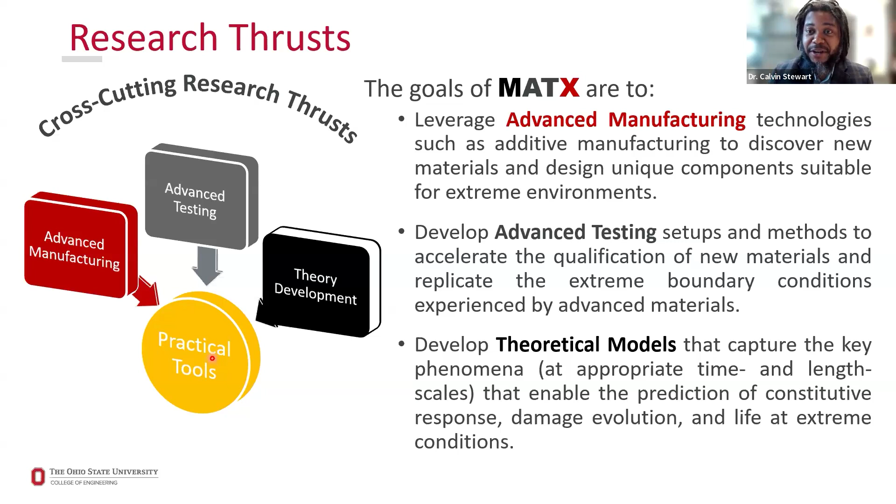With these new materials that we make, we then need to figure out how to test them, how to make sure they can survive those environments. So we also focus on developing novel, advanced test methods that allow us to more rapidly screen the resistance of materials to extreme environments, to create tests that mirror the real world rather than the laboratory they would usually be conducted in. And then finally, with the results of our experiments on our custom materials, we explore the response of materials at these unexplored domains, and develop new equations, new theories, or new ways of predicting the response to extremes.

Much of my research, I like to think on a high level. I like to think about what's motivating us. What in society are these environments where we see extremes? At the current place we are in society, the extremes are pretty extreme.

Whether it's hypersonic vehicles flying at 5 to 8 times the speed of sound with combustion temperatures over 3,000 degrees Celsius, or liquid-fueled rocket engines, your SpaceX's of the world, burning at over 3,000 degrees in their combustion nozzle for about 5 minutes to get to orbit, maybe flying multiple missions, to jet engines, to our fighter aircraft subject to flight dynamics with turbine entry temperatures exceeding 1,800 degrees Celsius.

Or even the lower temperature but still extreme industrial gas turbines, subject to 1,400 degrees Celsius, asked to survive and operate for up to 30 years or more. In all of these 4 use cases, these are materials being asked to survive above the base metal melting temperature. Nickel superalloys melt around 1,200 to 1,300 degrees Celsius. So in every one of these cases, the base metals or base materials we use would actually melt in reality. So what do we do?

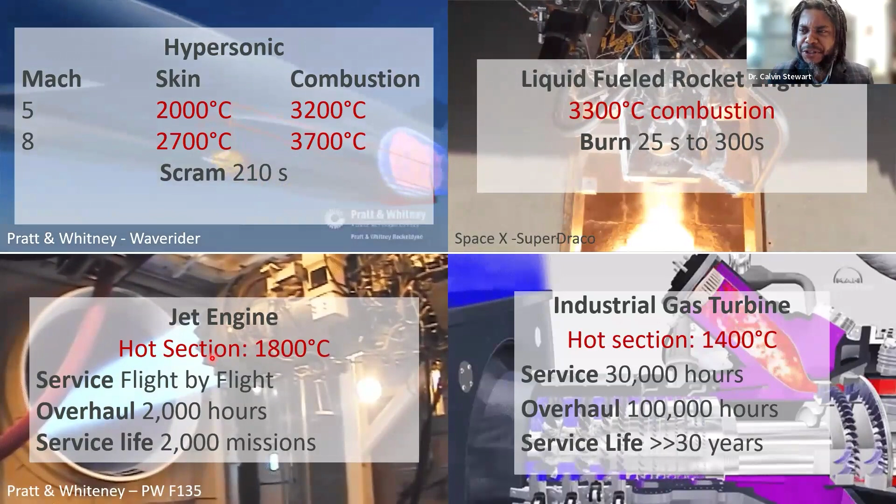So how do we push? How do we get to 4,000 degrees? How do we push beyond these limits? How do we increase performance? That's the question my group is really interested in answering.

Now, there are two kind of pillars or places that we sit in development of new materials. One of them is the concept of the materials genome initiative. This concept that we can computationally design from chemistry, we can predict structure. From structure, we can predict properties. And from those properties, arrive at performance in extreme environments.

But there's a lot of steps in this material genome initiative that we have to step through, from basic computational thermodynamics and molecular dynamics, to then making the material using additive or small scale arc melting to create small samples, to then post-processing, thermomechanically processing materials to arrive at a good structure, to then testing and qualifying the performance of those materials and components.

What my group sees is that there exists a bottleneck, another step needed to accelerate the materials genome initiative. That is this idea of developing rapid screening tests, where we can take very small volumes and samples, get parallelized information, more than one test out of a sample, in order to rapidly screen the resistance of these candidate materials and tell us, should we go back to the drawing board? Do we need to go back to chemistry?

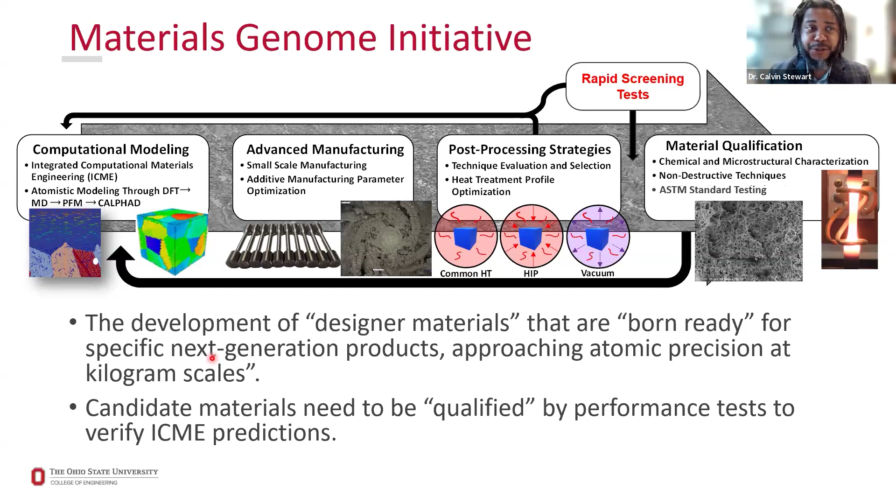Or can we actually proceed with the very expensive qualification required to get to service? With additive manufacturing specifically, the costs for qualification can be quite high. There's installation qualification of your equipment being installed, operational qualification, which is getting baseline ability to print the material of interest, to get it fully dense with a baseline microstructure before post-processing, then moving to performance qualification, where you actually start printing parts and making things.

When we add up the costs and timeline for deploying from chemistry to part, the costs and the timeline are extreme. We believe accelerated tests and new methods are needed to get us on pace with the rate that additive technology is evolving.

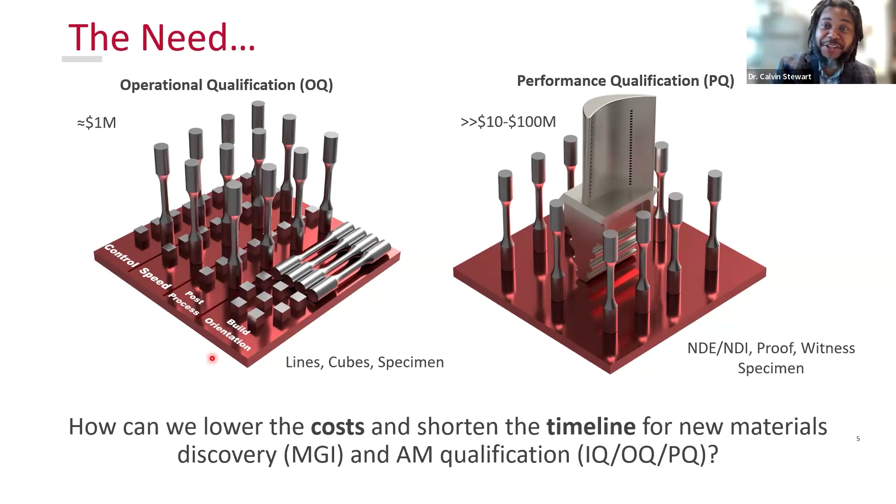So with our motivation down pat, we're going to go through our three cross-cutting areas of research: advanced manufacturing and some of the cool things our group is doing, advanced test methods, and then we'll round it out with theory. I'm going to hit you over the head with a few equations at the end.

Let's start with advanced manufacturing, starting with low-cost metal additive. My group has been working for the last few years on a metal additive technology called bound metal deposition. It's a technology where you take metal powder that you would usually use in laser powder bed fusion or directed energy deposition, and coat that powder in a binder additive and polymer to create a filament, the same type you'd use in a MakerBot or Bambu Lab machine.

The enthusiast 3D printers some of you have at home. The beauty of this is that the cost to deposit material goes from $100,000 or $200,000, depending on your laser powder bed fusion printer, down to $1,000 to print a basic metal part. It's an incredible capability. The challenge is the research for bound metal deposition: how do we go from this composite filament of metal and polymer to a part that is fully metal? That's where we need to develop the debinding and sintering technology to create fully metal and fully dense parts.

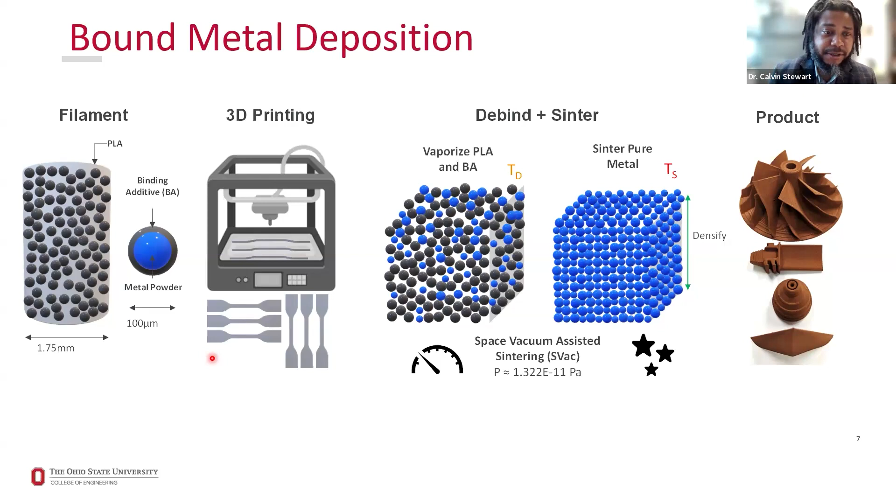Our group has been playing around with this for a while. We work with a small woman-led business who has a proprietary technology for creating these filaments, and we've been exploring a variety of alloys and the limits of what we can do with bound metal deposition. Whether it's 3D printing tungsten hypersonic leading edges, or even multi-material prints of a leading edge with an internal titanium rib structure, to creating full-scale impeller parts used in UAS, unmanned aerial systems, JetCat type UAS engines.

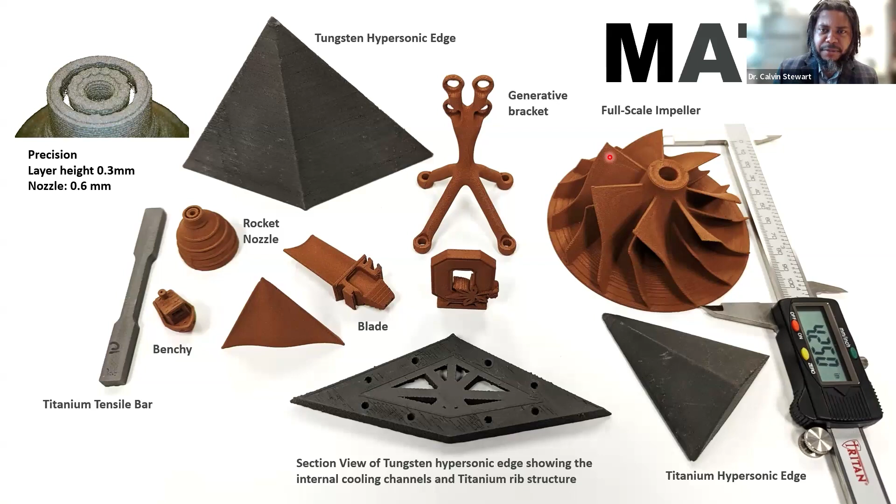So we've done a lot of demonstration work to develop print parameters so we can get good quality prints. But the newest thing we're doing, something we're really leaning into, is a new project coming online that should be announced any day: leveraging bound metal deposition to enable metal additive manufacturing in space. Right now we're literally sitting on the cutting edge. Just recently in January, a module was launched to the ISS enabling melt pool based metal additive manufacturing, the first metal additive manufacturing hardware sent to the ISS.

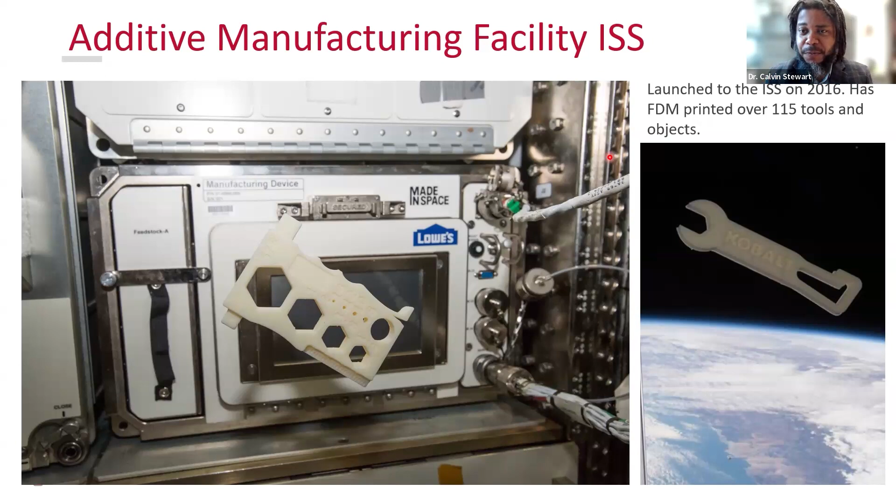However, FDM, your MakerBot type printers, have been on the ISS for well over 10 years, specifically the Additive Manufacturing Facility, the AMF, that sits in the Destiny module. They have been FDM printing various polymers, over 100 different tools and objects, for well over 10 years. So we believe we can leverage bound metal deposition, the filaments, to print metal in space with hardware that's been there and proven for a decade.

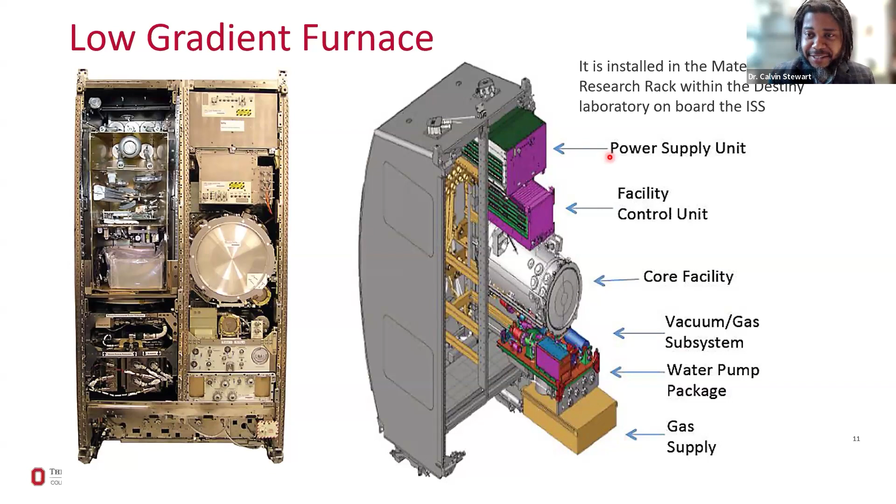In addition, there was another device, a low gradient furnace, that would allow us to do vacuum sintering to actually debind and sinter our BMD parts to create fully metal, really useful tooling on the ISS. Between these two devices, we currently have funding with Air Force Research Lab to demonstrate this technology in the laboratory. We're also working on a proposal to the ISS National Lab to launch some of this filament, as well as some demonstrators, to be debound and sintered, as well as printed on the ISS. It's really, really cool cutting edge stuff.

Now, where can this kind of technology lead? One area is on-orbit servicing, assembly and manufacturing. If we can make metal parts in space, then we can repair satellites. We can print structures. Perhaps, given a big enough space-based FDM printer, we could even print spacecraft using this technology.

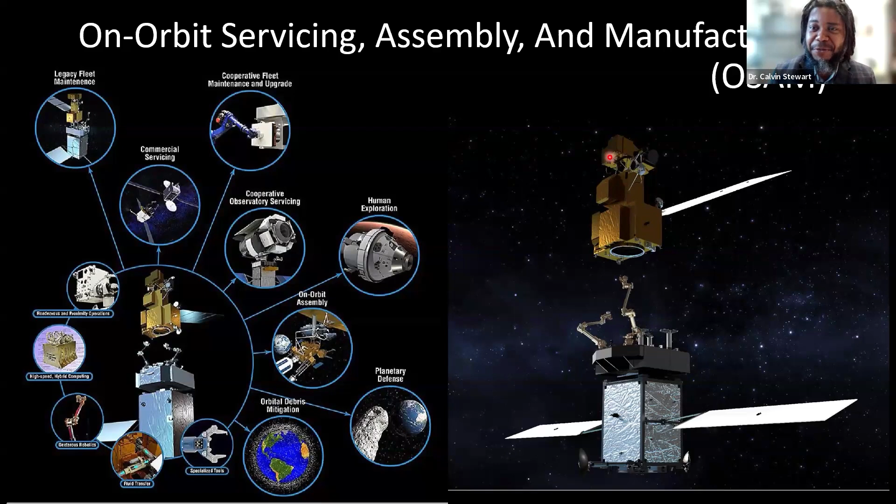Another area we're interested in for advanced manufacturing is multi-material or multi-metal additive manufacturing. Right now, most additive parts being printed and even deployed in various fleets are made of monolithic materials. We have one powder, say a titanium powder or an Inconel powder, and we fuse it using lasers or electron beams to create a monolithic part made of one chemistry. Yet most of these additive technologies do have the capability to blow different powder mixes or to deposit different types of powders right next to each other to create multi-metal parts.

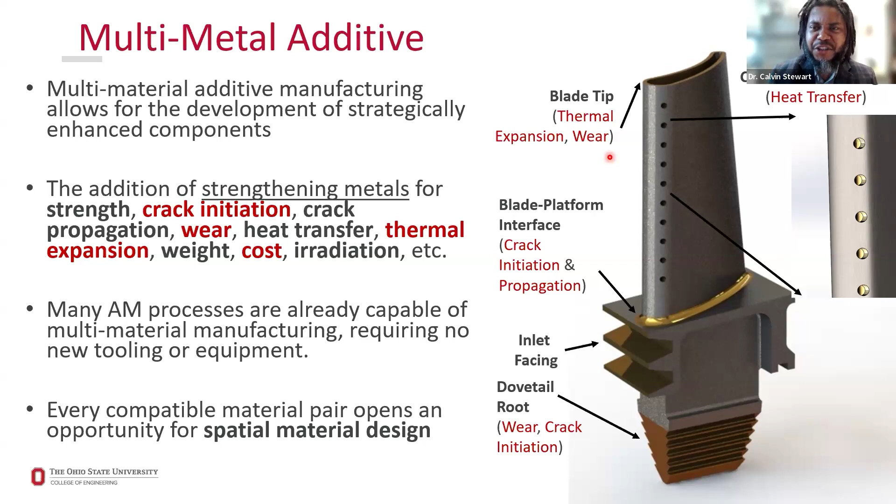So what we really want to do is develop a framework to enable design for multi-metal additive manufacturing, where we can create parts that have different strengthening materials to resist different forms of attack, whether it's cracking, creep deformation, literally depositing a thermal barrier coating while printing the base metal, or even resisting irradiating environments. This opens up our ability to do spatial materials design, generative design, or topology optimization, and place material strategically where you would want it.

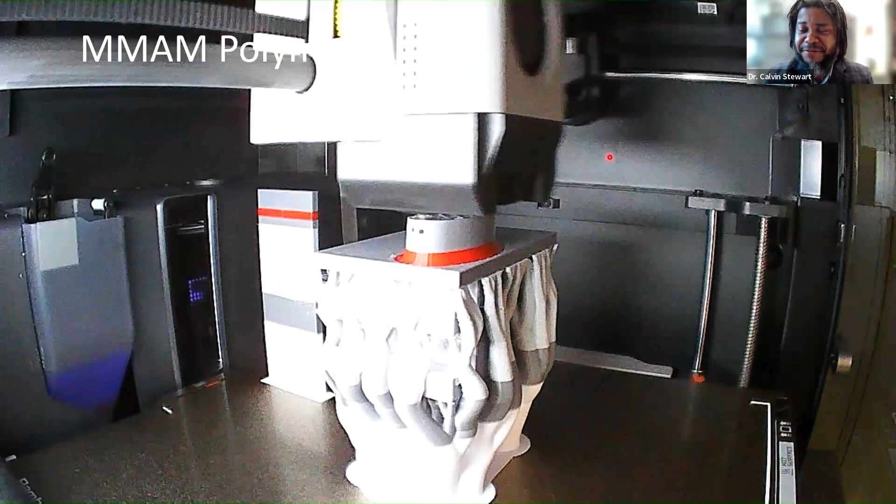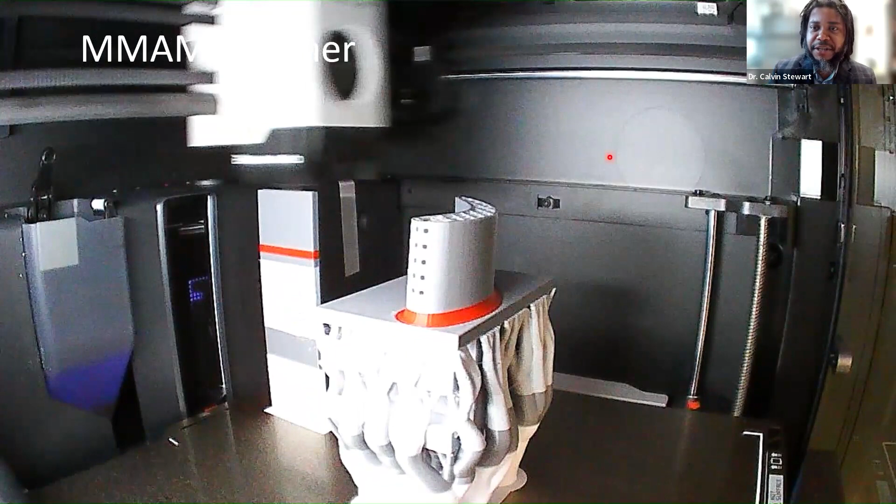To start out, my group believes in demonstrators. We say, hey, this is easy to do on FDM—just about all the FDM printers you buy nowadays have the ability to print multiple filaments. So let's make a demonstrator of our goal, this multi-material turbine blade, and then step through the process, develop a design framework, address the problems or challenges, and then move to metal.

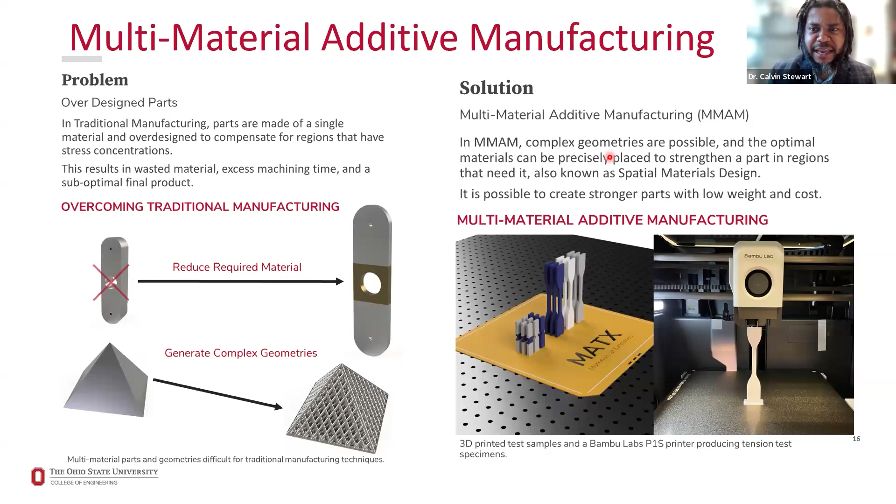So for multi-material or multi-metal additive, what are the advantages? Well, we gain the advantage of lightweighting parts by reducing the thickness of monolithic materials and replacing critical regions with higher strength, higher ductility, or more wear-resistant materials. Combined with additive manufacturing, we can also create parts with hierarchical, periodic, or lattice structures that further lower the weight while giving multifunctional responses. As the technology advances, we'll be able to lower the weight and cost of parts while increasing their resilience and resistance to extreme environments.

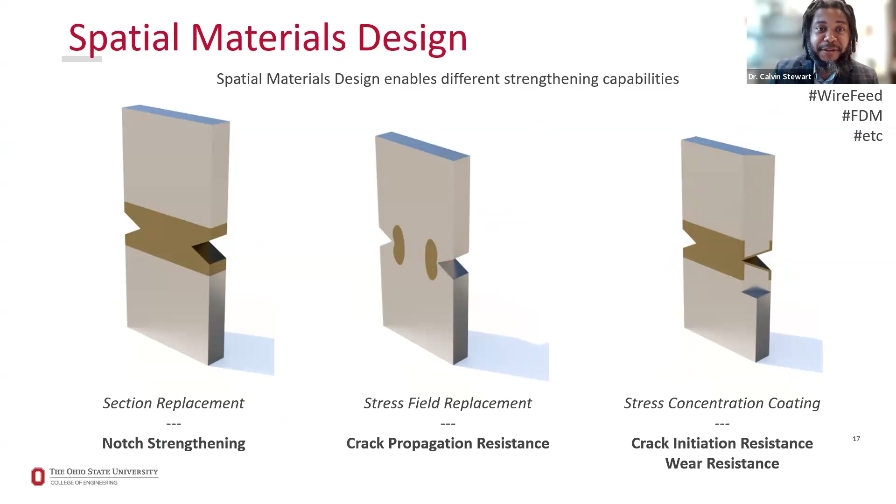Our current study focuses on notch strengthening, a very traditional and conventional challenge. When you design a part with a complex shape—a notch, an edge—stress concentrates there. Some materials resist stress concentrations and some don't, which affects your ability to design a thin part. So we've thought of a couple of concepts: section replacement, completely removing a section and replacing it with a higher strength material, or being smarter about it using computational tools to design the placement of material to track stress or strain fields. Furthermore, for surface-based effects, skinning a part—developing skins that protect from wear or crack initiation—and then transitioning this design for additive technology to the various types of additive manufacturing.

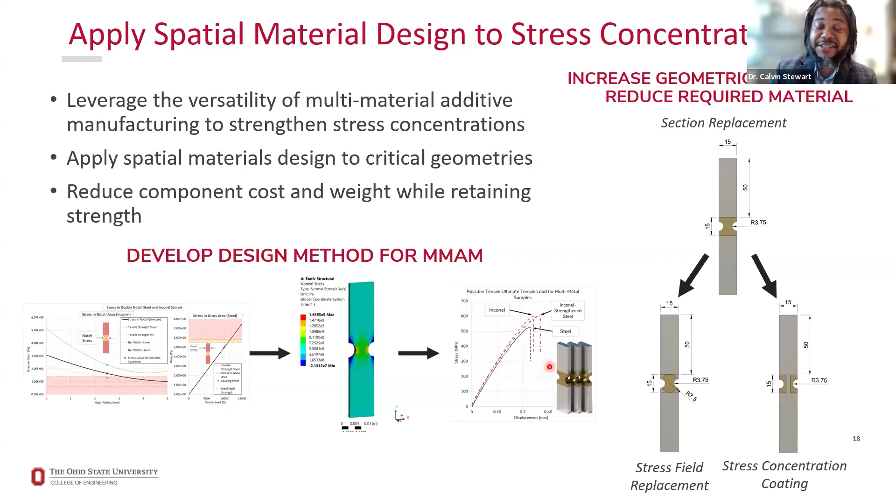So what have we done? We started old school: we developed analytical tools, maps, that help us design a notch-resistant part that's multi-material. Then we moved to finite element analysis to determine if our analytical solutions and design approach match what we'd expect in the simulated world. Finally, we developed a test framework and test method so we can assess if our analytical and computational results match the experimental.

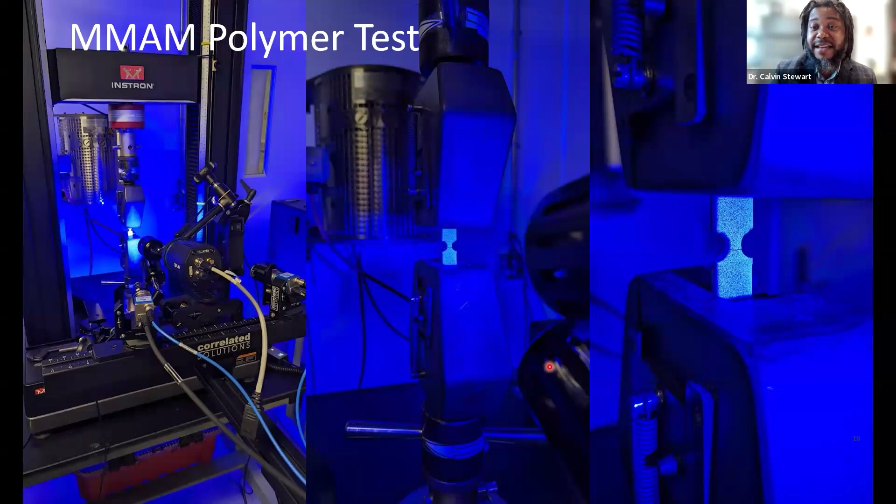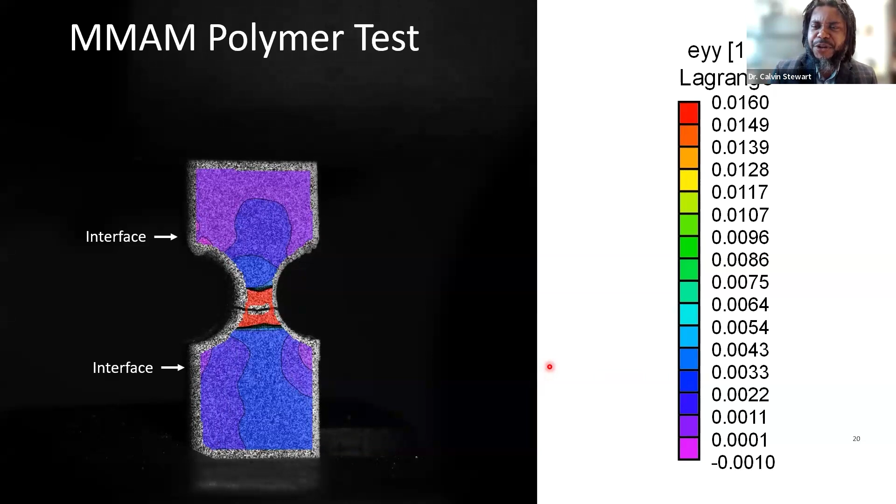From there, we moved to testing on our FDM prints of multi-filament type of tests—testing samples of two different filaments that have a different stress-strain response. We found that our analytical and computational predictions match what we expected in the real world, and furthermore, that we had no stress concentrations at the interfaces. If you select the right build parameters when printing your part at the interface, you can avoid any interfacial strains or mismatch.

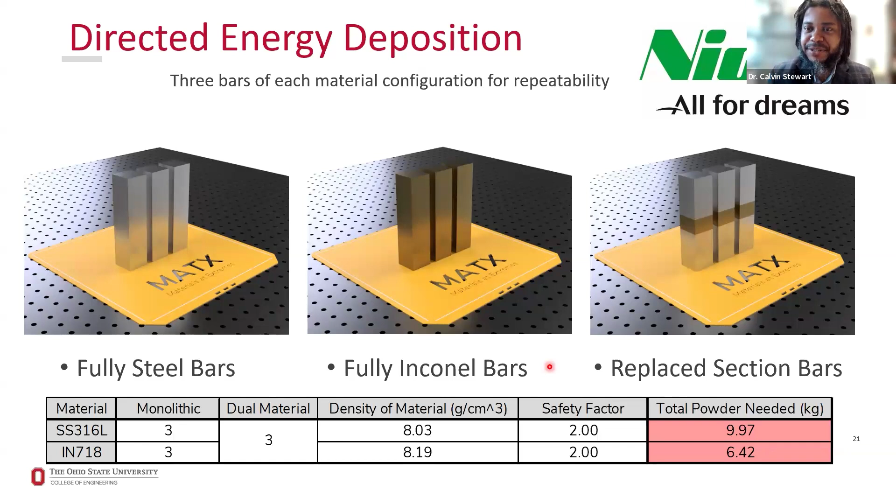Really cool stuff. So now we've moved from polymer-based science to multi-metal-based AM. We're working with this company, Nidec America, doing directed energy deposition, blown powder, multi-metal additive manufacturing. At the current point, we've created some bars that are a combination of 316, our weaker material, with Inconel 718, our nickel-based super alloy. All we have to do now is cut them and repeat our test methods to prove out this new design for a multi-metal additive manufacturing approach.

Now from this, we've got a lot more steps to make. We've got to go from just doing notch strengthening to saying, well, what about high temperature? We're trying to get to extremes, right? What happens when we take this to 1,000 degrees Celsius or 1,400 degrees Celsius? What happens when we subject it to dynamic loading conditions where crack initiation and fatigue crack growth may be a concern? What happens if we take it to super high hertz and start to have things like wear resistance occur?

Can we develop a framework for different types of strengthening, design for different types of strengthening, and then integrate that into some computational tool to enable generative, AI-based design of these multi-material regions that strengthen an overall part to form multiple forms of attack? It's a lot of potential there—a lot of potential outcomes.

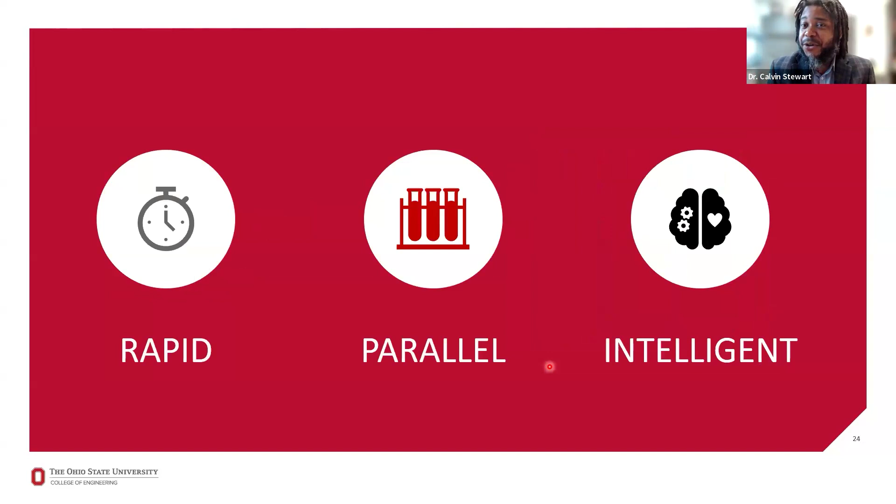So now let's move to the second pillar in our group, and that's this idea of advanced testing. My group touches a lot of different types of testing. We do rapid testing where we time-accelerate and try to shorten the duration of tests. We do parallelized testing where we try to capture multiple streams of information from a single sample. And finally, we try to develop intelligent tests—tests that have rules but also machine learning-based controls in order to run autonomously. We don't have enough time to touch all of them.

So today we're going to focus on parallelized testing.

Before we go into these advanced tests, let's talk about a standard test. Standard tests for materials to assess their properties at extremes are usually based on a testing standard. There are various standards around the world—ASTM International, ISO standards, French standards, British standards. My group focuses on ASTM International. In standardized testing, the goal is to produce a result that is repeatable, meaning if you test multiple times you get the same answer, and reproducible, meaning if a different lab around the world tests, they are also able to reproduce the same results.

Because of that, you have to develop very stringent requirements for every test that you run. And because of those requirements, you need to run many, many repeat tests in order to quantify the uncertainty of your test methods. Specimens need to be subject to uniform temperatures with very tight tolerances of plus or minus 2 degrees Celsius. You need uniform stress, both in the design of your sample and the alignment of your load chain. You need to calibrate your system to know the accuracy of your load cell, your thermocouples, your extensometers. And then you need to repeat your tests multiple times and get your standard deviation, your mean values.

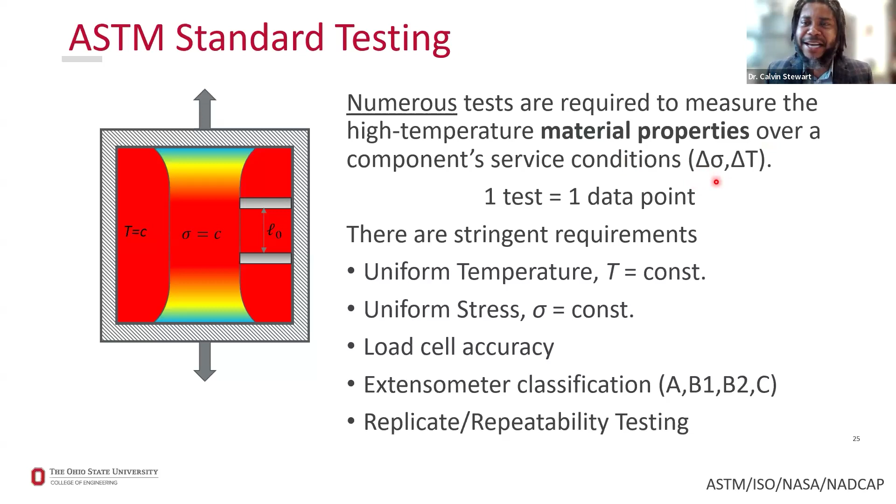All of this then leads to needing tens to hundreds of tests for any particular material of interest if you're subjecting it to extreme environments, ranges of stress and ranges of temperature. Because of that, it is very expensive to qualify new materials for service. If you make a new chemistry and want to put it on an airplane, well, guess what—you've got 10 years of work to do before you can fly that material.

So what our group is doing is leaning into moving away from the standards. We still believe in the standards—we don't want to toss them away—but we wonder if we can develop rapid screening tests and use newer technology that allows us to get information faster, in parallel, and be able to screen to say, you know what.

Let's make a bunch of different chemistries. Let's run one test over a range of conditions, and then we can determine the optimal chemistry to spend 10 years on. That's the goal. That's kind of what we're focused in on.

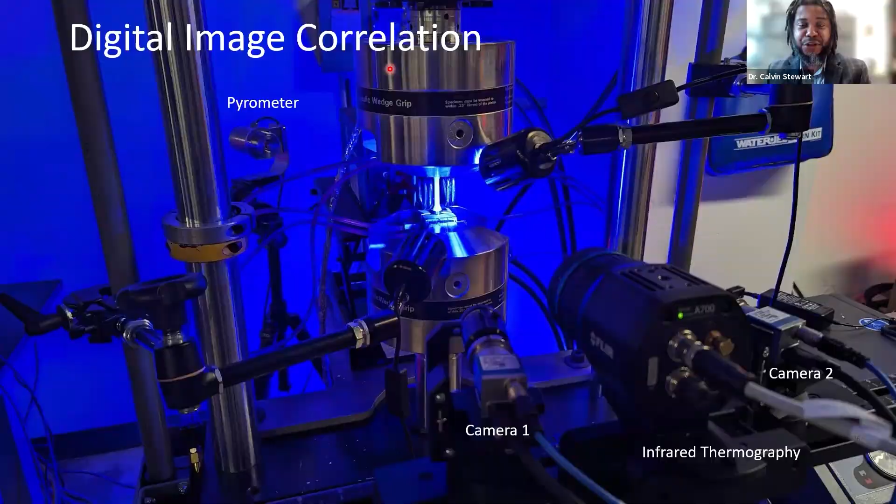So to do that, we're using this technology called digital image correlation, and we're doing a special version of it. We're using infrared cameras, and we're using 2 white light cameras, so it's 3D digital image correlation. This technology allows us to track a speckle pattern on the surface of our samples, and to back out the displacements, as well as the calculated strains from those displacements in 3D on the surface of these samples.

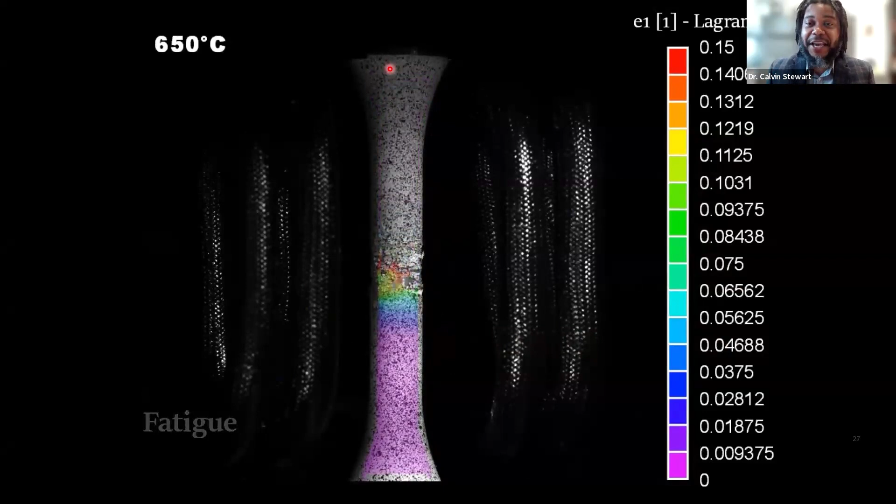With the infrared camera, it also allows us to gather the temperature on the surface of the sample, and then be able to measure thermomechanical strains in extreme environments, to look at the effect of stress, temperature, and strain, gathering all of that information as a matrix of data rather than 2 points in one line.

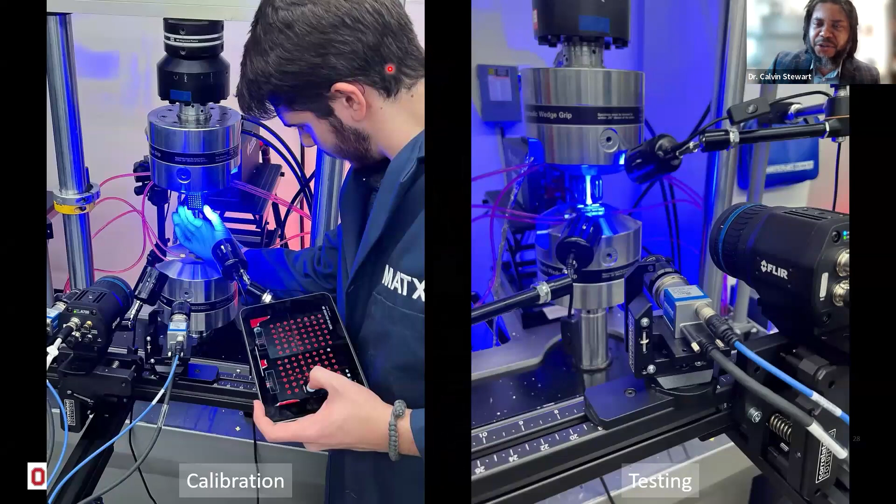Now there's some challenges in this technology. There's science to it, but there's also some degree of art. Whether it's applying the speckle pattern and making one that can survive 2,000 degrees Celsius—not easy—whether it's the calibration of the cameras so we can get the Z dimension to understand the out-of-plane dimension, or even filtering the light, saturating the sample with a certain blue wavelength of light, and filtering down to certain wavelengths that we see in our monochromatic cameras so we can cut the glow of rocket engine samples and be able to see their strains.

Now, as we overcome all of those challenges in this new technology, it enables us to get some very interesting information. One duo of tests we've been developing, we call the gradient boundary condition tests.

These are tests that, instead of following ASTM standards with a uniform sample for one constant stress value, or finely tuning temperature to have a set constant temperature in the vicinity of the sample, instead use what the real world gives us: stress gradients and gradients of temperature. That's the real world.

And if we can map those gradients, if we can design a sample with a bell shape where we can calculate what the stress is as a function of area, and capture the strain along those different values of stress—well, guess what? We just developed a test where we can get hundreds of individual conventional test results from a single sample. Make one sample, get 100 test results.

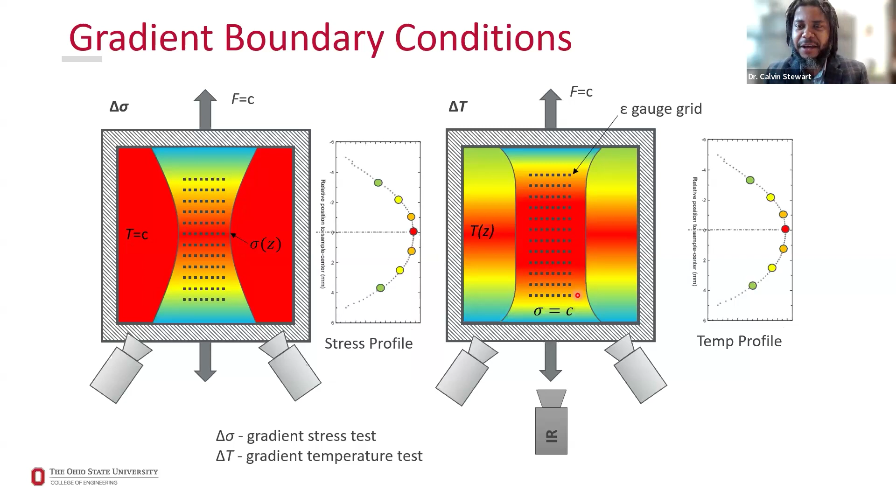Now there are some limitations to this approach. One is that if we're testing a part to failure, we only have one critical location in our part, and that's where we'll have a full test result—say a full creep test or a full tensile test. Everywhere else, all our other points in the sample will only give partial information about the resistance of the material. So we'll need advanced modeling or theory development in order to predict those other non-failed responses.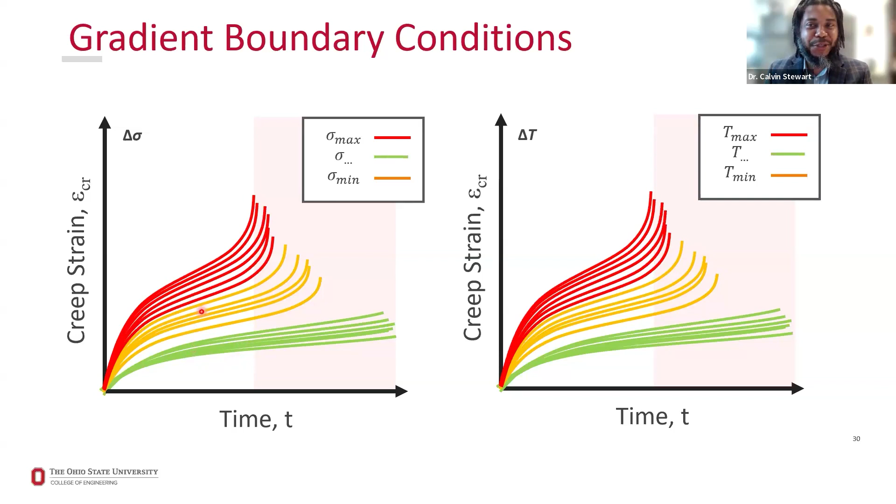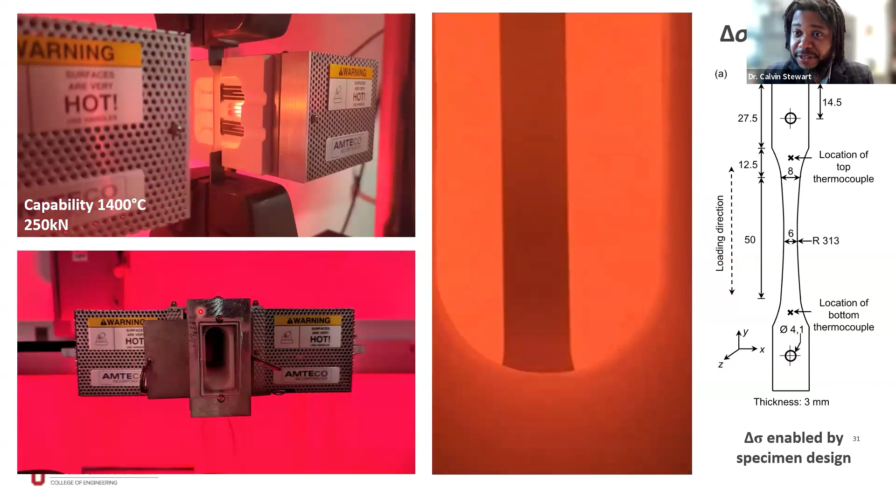We'll get to that, though. We'll get to it. So in our lab, over the last 2 years, we've built setups to do exactly these gradient temperature tests—whether it's the Delta Sigma test setup, where we have 2 machines configured for this that can test up to 1,400 degrees Celsius with load capacities of 250 kilonewtons, allowing us to test these gradient samples.

We've machined some 4130 steel samples with a specially designed gradient to test and assess this technique, using the Delta T test setup that we spent a lot of money building, with very cool capabilities of testing with control to 1,800 degrees Celsius.

If we're not careful, any metal we put in here is going to melt. If we switch from pyrometer control to manual command, we're pushing 400 amps at between 100 to 400 kilohertz of frequency, so we're going to have a puddle if we're not careful. We can melt just about anything.

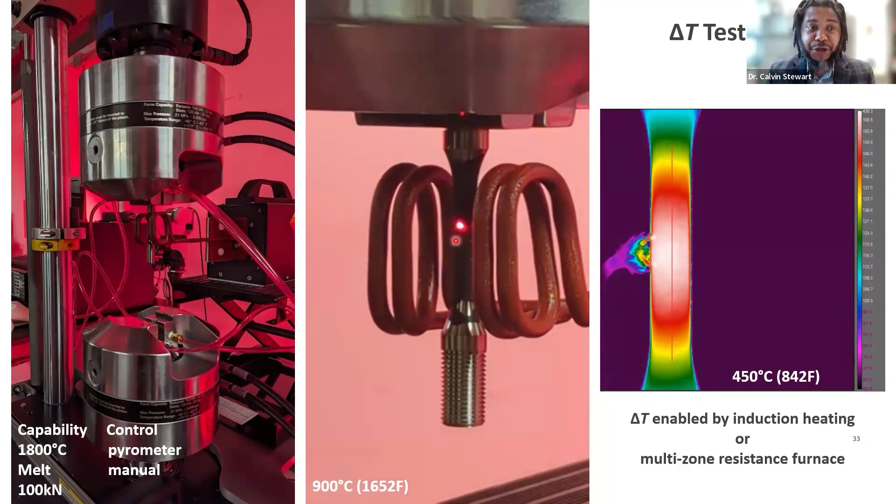If we switch out our pyrometer, we can go to 3,000 degrees Celsius on this setup. We specially designed a coil to induce a quasi-static temperature gradient. With pyrometer control, we can create stable gradients, then test our uniform sample and pull out data from 100 samples.

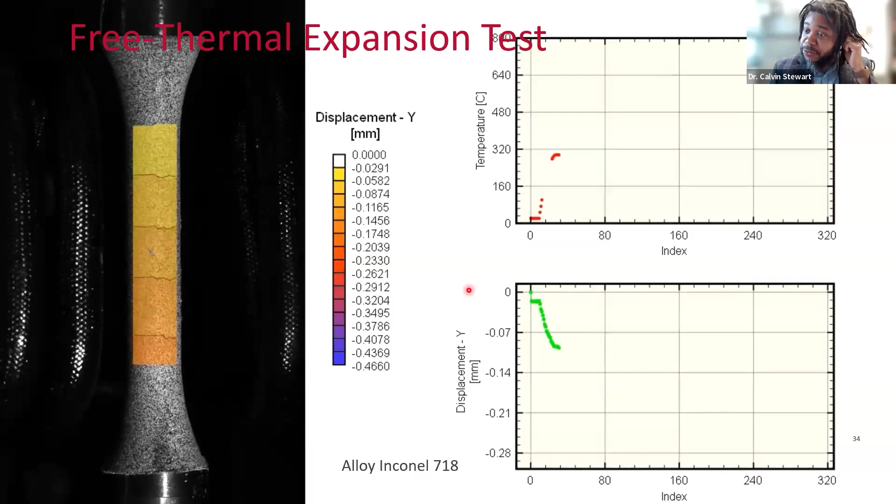Some of our early work here has been calibrating and designing speckles that can survive extreme environments, and also working on filtration of light so we can keep correlation and avoid gaps. The final test method we've been leaning into, which we built something for, is what we call the Delta M, the gradient material test setup.

This is the idea to say, if we can parallelize boundary conditions, if we can make stress a gradient or temperature a gradient, what about the material itself? What about creating functionally graded materials where we change the additive powder on the fly, and subsequently change the chemistry layer by layer in a part?

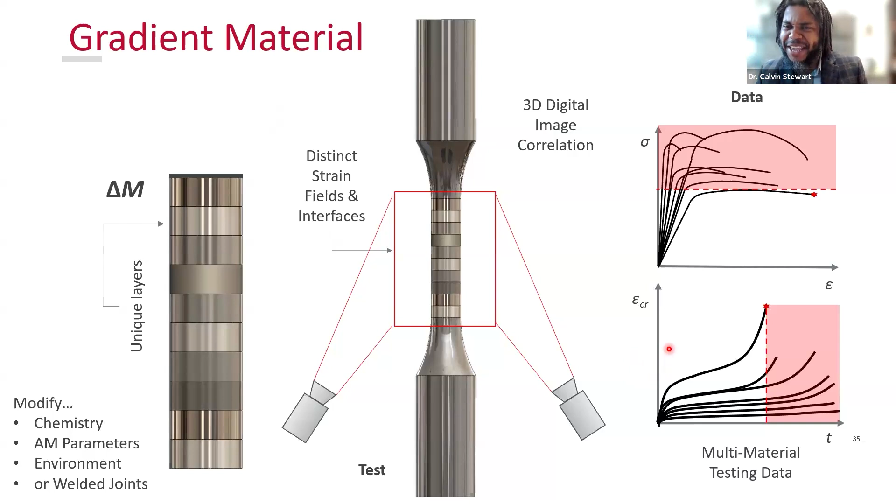If we're able to create components with these unique layers of different chemistry, we can create one sample that represents 10 or 20 different chemistries we think might be good candidates, then run correlation to determine which one we want to build full bars on. Which ones actually have empirical evidence of goodness? Our computational models tell us they should be good, but which one actually, empirically, or which range of chemistry is the sweet spot we should explore?

So we've built another test setup we call Delta M, which gives us a full field view of our sample from tip to tail, with very fine control on temperature, plus or minus 1 degree Celsius, with a big window on it. This setup allows us to test up to 1,000 degrees Celsius — pretty hot, not 1,400 or 1,800, but still pretty hot — with a load capacity of 50 kilonewtons.

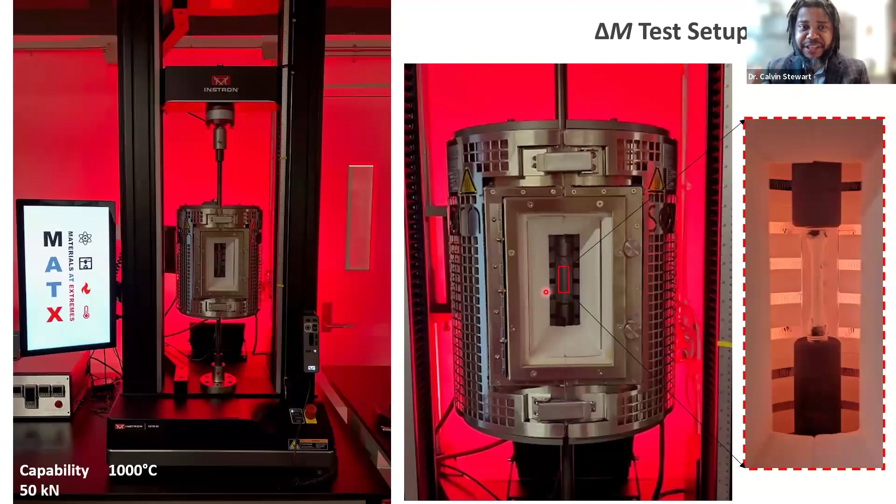We can then configure this to measure the strain on the surface and determine, in those regions, those zones, which composition will survive.

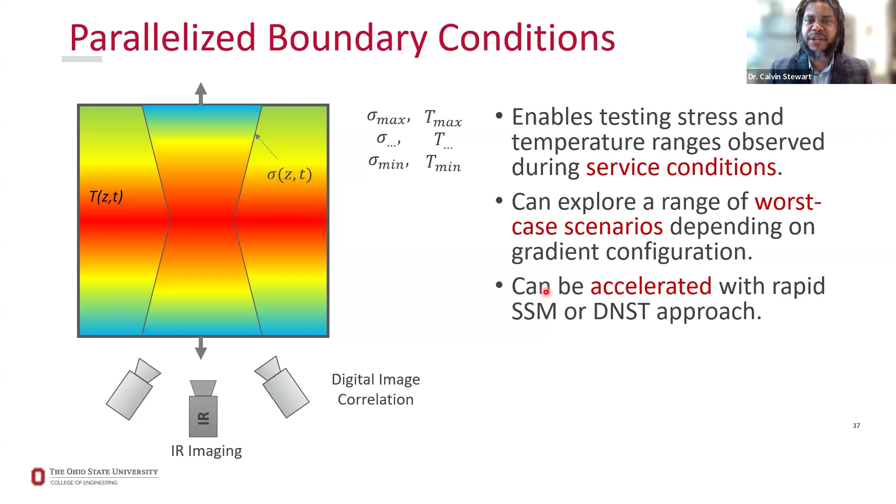Finally, we've thought: if we're parallelizing a few things, what if we just parallelize them all? From a quasi-static temperature gradient, to a bell-shaped sample where we know the force, to a functionally graded material. Could we use this to do A/B testing between one material and another? Or as a screening test where we're designing a material for a specific range of stress and temperatures, to determine if it's strong enough — would it survive? We can make this an extreme torture test for specific applications.

Our lab here that we've been building has existed for 2 years — we've built it over that time. It's pretty incredible. We've got 4 servo hydraulic load frames that allow us to do dynamic type testing in quasi-static, so we can do tension, fatigue, crack growth.

We have 1 electromechanical machine that we use primarily for quasi-static and accelerated creep type tests. We can test from 50 to 500 kilonewtons, from room temperature to 1,000, 1,400, 1,800, up to the melting temperature of your superalloy. Depending on our furnaces, we have heating rates up to 35 degrees Celsius a second, so in about 30 seconds you're at 1,000 degrees. It's pretty hot, right? Just saying, it's pretty hot.

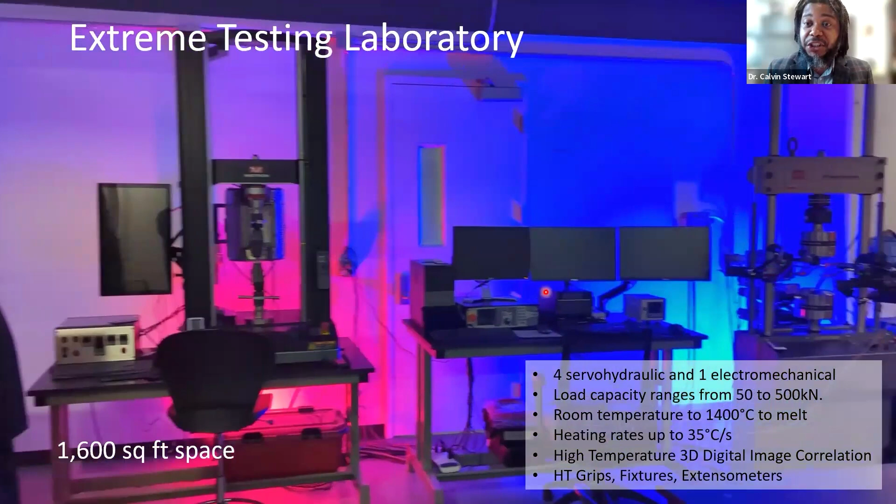Using our imaging, the wavelengths of light we use to saturate our samples, the cameras, the filtering and optics, and multispectral imaging, we're able to capture the thermal mechanical response over a wide range of conditions. Very specialized. I'm very proud of my team for all the hard work we've put into this lab, from developing standard operating procedures to safety protocols.

When you get to certain temperatures and you're using certain metals and powders, things like to melt, or metal can burn—I'll just say that. You can have metal fires. It's been incredible these last two years standing up this facility with unique capabilities.

Now, the final thing I'll mention about advanced testing is, with all of these techniques, it takes a lot of human expertise and knowledge, from safety to the design of experiments, test matrix design, to programming the machines to operate safely and do what we want.

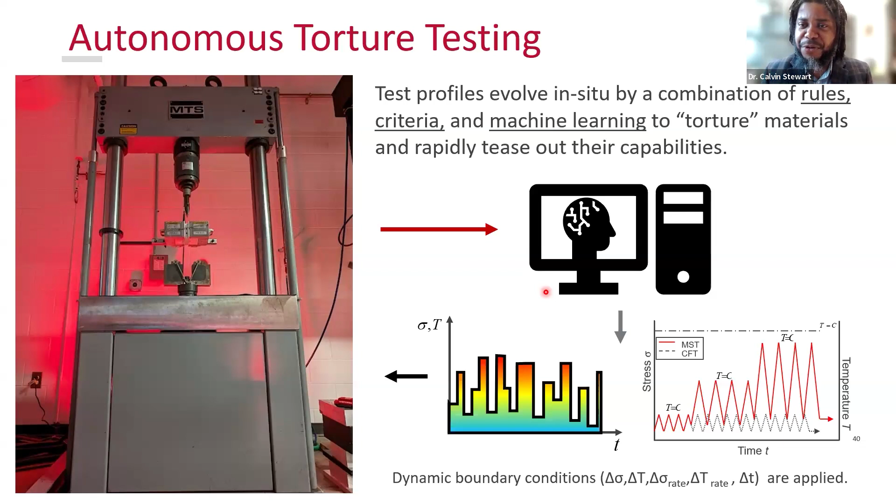One thing I'm really interested in doing, and I've talked with my team about, is combining this human knowledge we have—the rules and criterion we already use to program our controllers—with machine learning's ability to detect responses and make decisions based on those responses. The question is, could we leverage the combination of human and machine intelligence to make autonomous some of these test procedures and screening tests that take a bit of effort for my team to design and execute?

So finally, we move to the last pillar of our group, and that is taking the results of our material manufacturing and our novel testing, and developing theories that tell us how materials respond in these extreme environments. That's advanced theory development.

Much of our work has to come through the development of software tools. With the data we generate, whether it's conventional ASTM tests or 3D digital image correlation, where we have matrices of data at every capture point and multiple images for every capture point, we have to develop software tools to regress and clean our data up so it becomes something we can use.

So we use multiple languages, whether it's Python, Fortran, or even integrating finite element code such as ANSYS and Abaqus, so we can do digital twin simulation, so we can match the experiments to the simulations and see if the models are real—if the models that were designed 50 years ago actually capture the real world. So many of them don't, right?

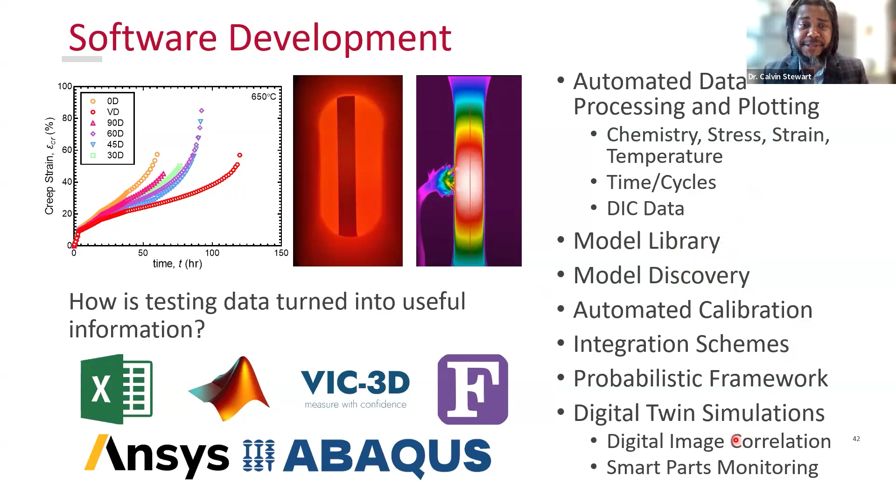From that, we do things from data processing, create libraries of conventional classic models, develop ways to automatically calibrate models, different integration schemes, and digital twins of full-field measures.

Over the last 10 years, my group has developed a number of equations that we've learned from our experiments. One of the more modern, and I'd say more impactful, is the Wilshire-Cano-Stewart model. It integrates the modern Wilshire equations for creep rupture, which are very popular and have become the new de facto over Larson-Miller, with continuum damage mechanics, so that we can both predict stress rupture, minimum rate, but also predict the creep deformation and damage evolution within materials.

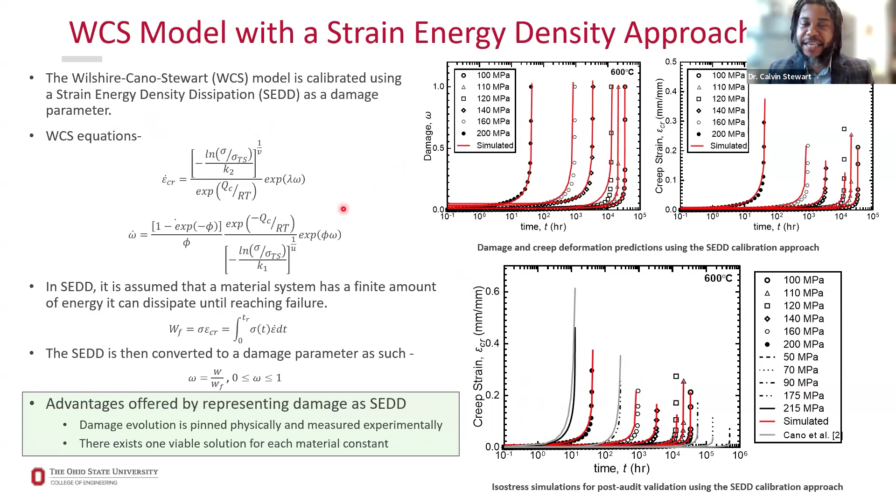What's even cooler about this is some of the newest stuff we're currently in the process of publishing—using strain energy density dissipation, SEDD, as a measure of damage to pin down the calibration of the parameters in these types of models. So we've had some incredible outcomes with this model.

Another new model we've developed, which we'll be presenting at Turbo Expo this summer, is a threshold-based model. Often in creep flow, there's a question of at what stress levels do you have an infinite life? In fatigue, we have the endurance limit—we know it, we can test for it with a rotating bending machine.

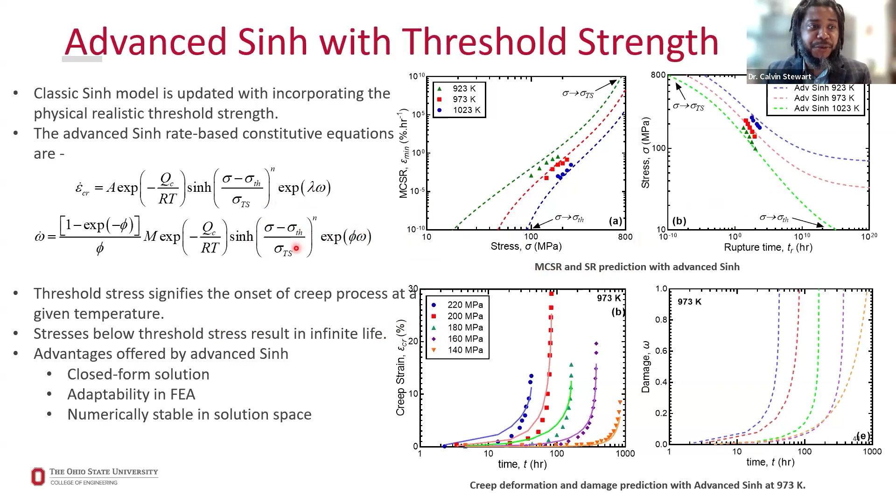But in creep, we can never reach the endurance limit. Infinite creep could mean 1,000 years of testing—literal 1,000 years of testing. So we've developed this threshold-based model that helps us pin down a more physically realistic estimate of what that threshold stress should be, compared to other models.

Now, moving from these models we call deterministic, we know in our experiments that there's uncertainty. If we run the same test 5 times, we get 5 slightly different answers. So we ask ourselves, if we use deterministic models that only give us one answer, are we designing properly?

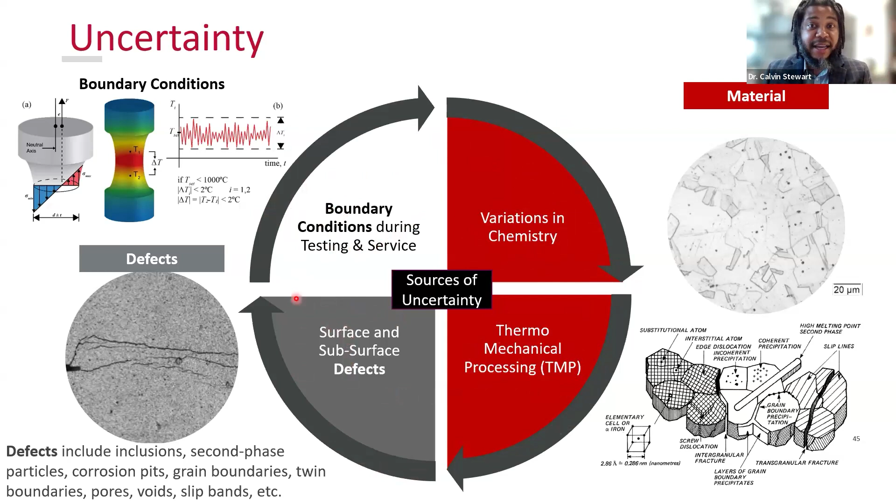Are we designing for the probability of failure, or are we designing for the average life, a potential life of a part? So what our group has done for theory development is look at the sources of uncertainty in our test methods, whether it's boundary conditions during testing, variations in chemistry, processing, and defects, and how we integrate those into our deterministic equations to make probabilistic predictions.

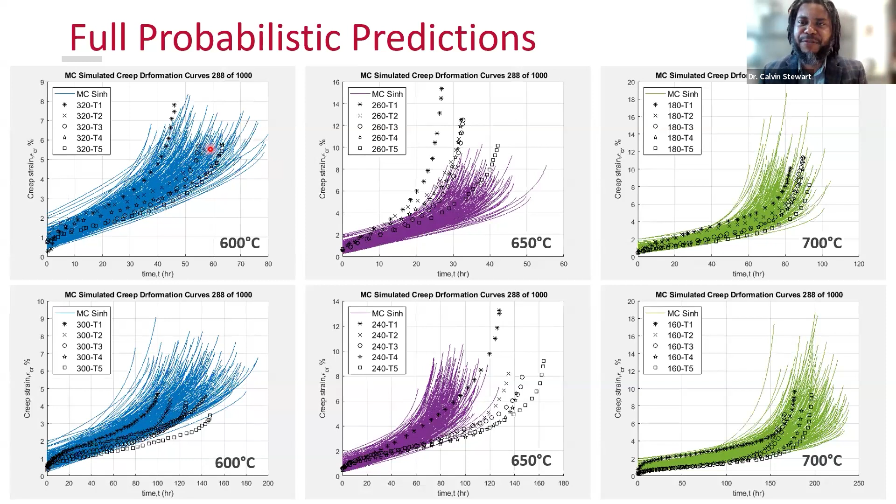We've used things such as Markov chain Monte Carlo so that we can take the results of 5 at minimum tests and then simulate thousands of variations based on the probability of failure of those 5 experiments, giving us an ability to rapidly screen and have the probability of failure, designed for probability rather than the average with big safety factors.

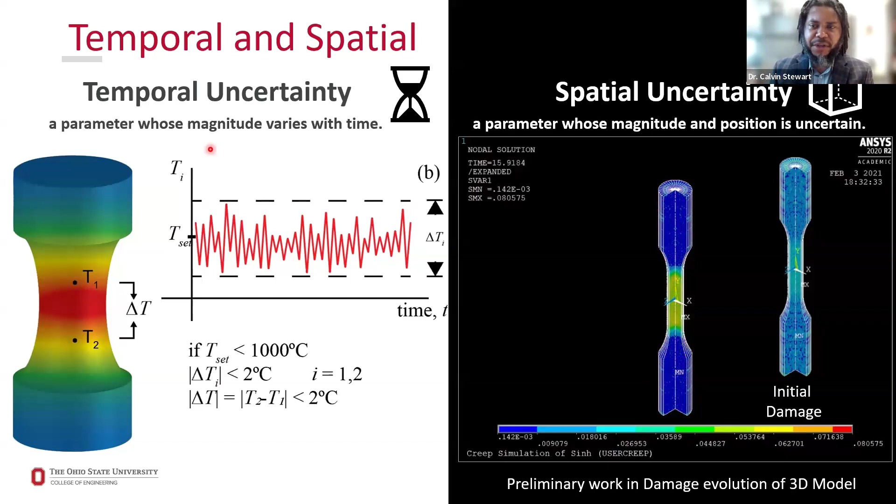From there, we've started to explore things like temporal uncertainty. What happens with fluctuations with time? To spatial uncertainty - what happens when you print multiple samples as you have different defects depending on where those samples are built on your build plate? Could those uncertainties be a source of the cause of failure at different times, and a crack initiating and cycles to failure changing? That is a very interesting space that we're exploring.

But furthermore, machine learning - it is the new tool. It is the new tool in the toolbox. And you are doomed to fail if you choose not to learn these tools. Some people believe that machine learning is a tool that shouldn't be used, that it leads to people lacking or losing their understanding of the fundamentals, of the science, of the theory behind things. But I'm a firm believer that tools are only as good as the hand that holds them.

Say in the 40s, all design was done analytically with humans as calculators, right? The rise of the computer allowed us to use computers as a crutch, so we could do calculations using a computer. The rise of finite element analysis has now allowed us to design parts and figure out stresses and strains and complex geometries using a computer as a tool.

And even further, the rise of generative design and topology optimization has allowed us to let the computer design the part itself for us. However, we still have to have a human involved to determine if the outcomes of those tools we use will survive contact with reality.

We still have to have an understanding of the fundamentals. And so our group is leaning into using machine learning to aid us in the discovery of answers that are hard for us to answer with our own domain of knowledge.

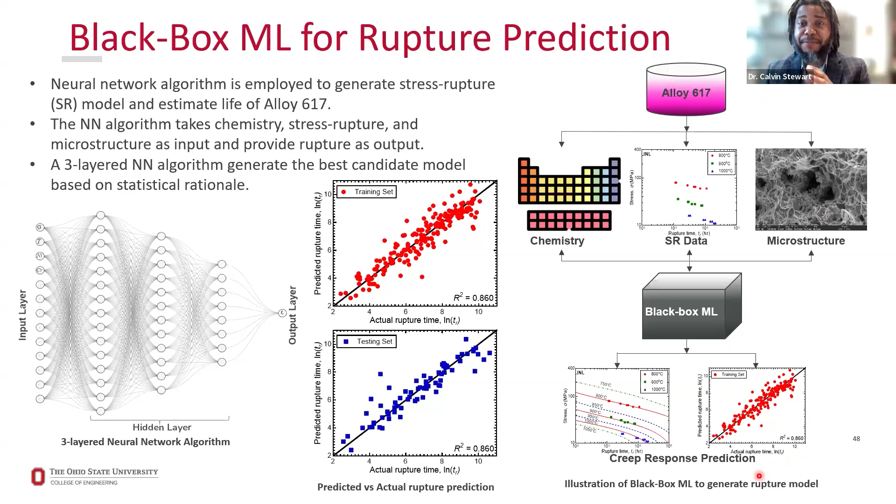One of the things we've done is look at black box machine learning, your neural networks of the world, and apply various different neural network-based algorithms in order to connect chemistry of materials directly to their performance using these black box AIs, so that we can try to predict the chemistries that will improve the resistance of materials.

We've been able to do testing, training data sets, and then compare them to post-audit validation - separate data sets that we hold hidden from our machine learning - and been able to make reasonable predictions of those hidden data sets of performance of materials. But the problem with black box is there are some levels of human interpretability that it lacks.

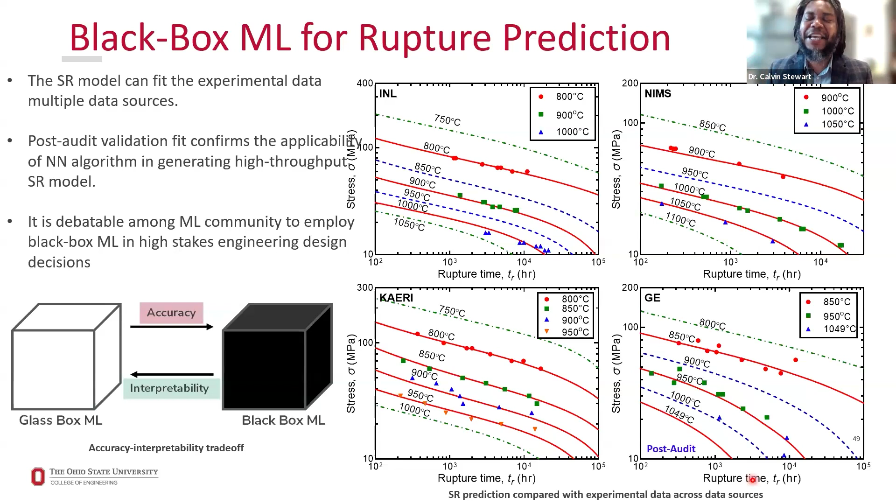We can't understand with black box how it actually makes the connection between chemistry and performance. It's something that's opaque to us. It's something that can be a page-long polynomial chain that's hidden from us in our algorithms.

So one thing my group's leaning into, an area of research that not many people are doing, something that we think is very cutting edge, and we are very much on the edge of publishing this, is the idea of using glass box artificial intelligence - AI that is not opaque, that is transparent to the user, that a human can interpret, and we can use mathematics and science to accept or reject the outcomes of that AI.

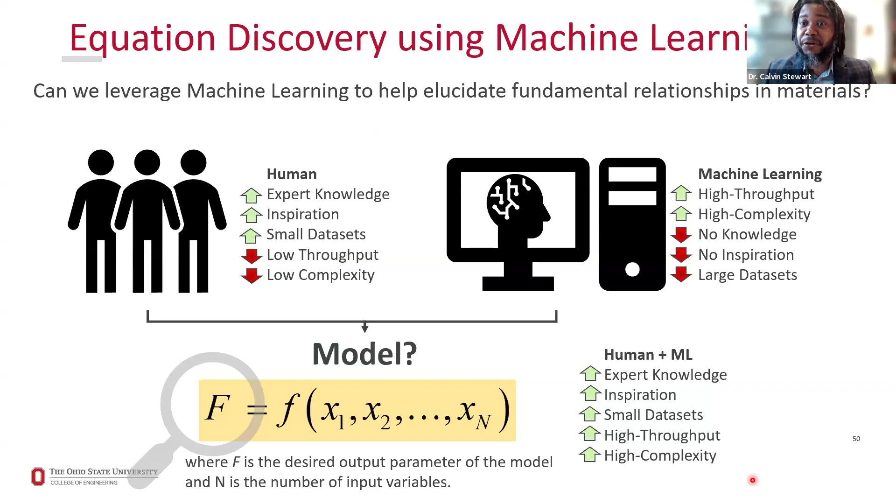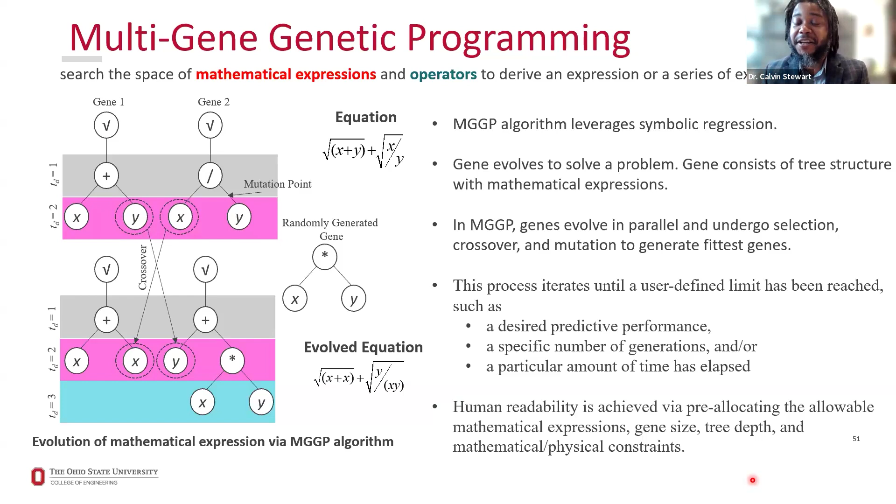We are in essence pairing the human's expert knowledge, our inspiration and ability to work with small data sets, with the machine's ability to look at highly complex multivariable problems and give you a high throughput. We're using this algorithm called multi-gene genetic programming with symbolic regression that allows us to genetically engineer equations that we can perceive and accept or reject as physical facts or phenomena between our variables. So the human and the machine connect at various spaces.

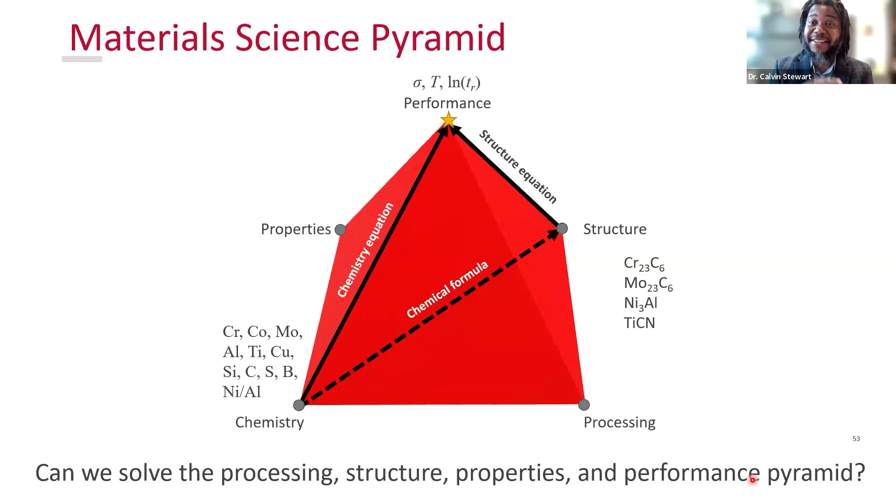We believe that by using this technique, we can encapsulate and close the material science pyramid. We can take chemistry information and connect chemistry to structure, chemistry directly to performance, chemistry to properties, or chemistry to processing. As long as we've identified the proper inputs and understand the physics and connections between these pillars, we can create reduced order equations that connect different domains of science.

Very interesting stuff. Now, in order to use these algorithms, any machine learning or AI, the human must actually train and control the way that those algorithms execute their operations.

For multi-gene genetic programming, there's a lot going on. There's an initial seed population, they make some babies, we calculate how good those babies are, we build the next generation, another population. Then we seed populations across the globe so we can try to get a global solution, where every parent and child is literally an equation.

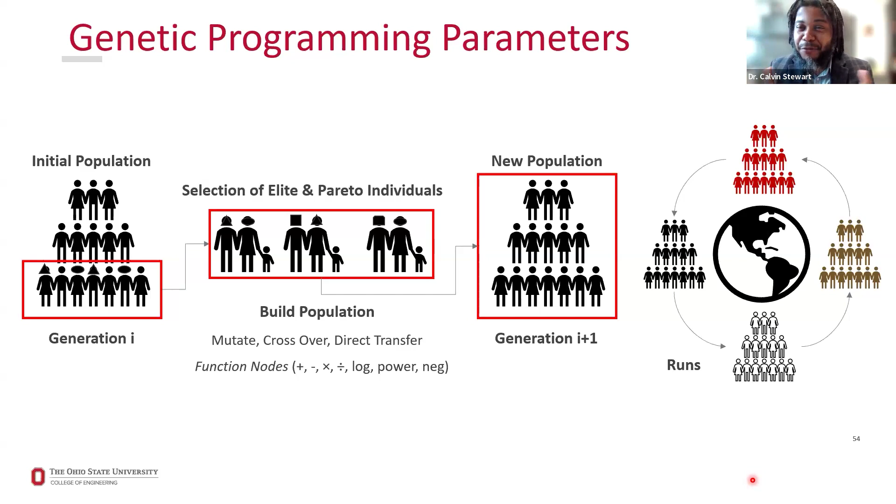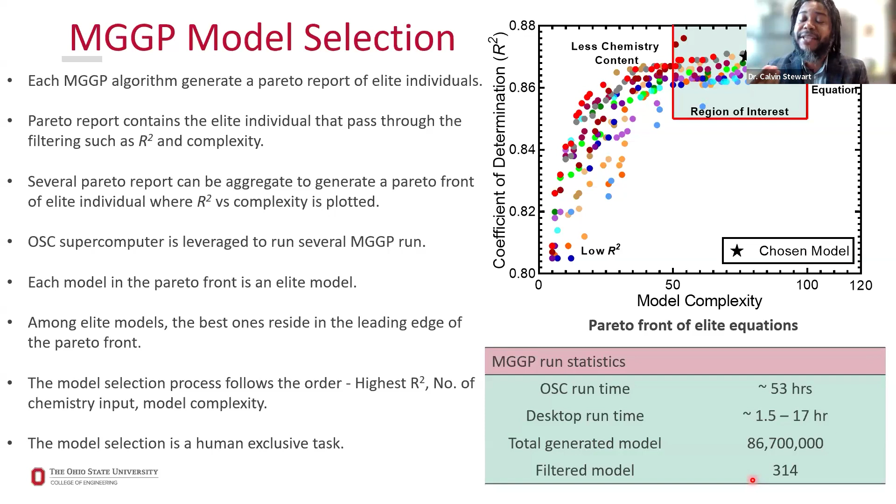From seeding multiple populations around the world and evolving and genetically engineering them, we create a Pareto front of elite individuals, elite equations that we think have good characteristics, looking at the combination between equation complexity and the coefficient of determination, the accuracy of that equation. Then as humans, we have to screen all of these elite equations - which ones are realistic, which ones don't violate physics, have dimensional homogeneity, are things that scientists may accept.

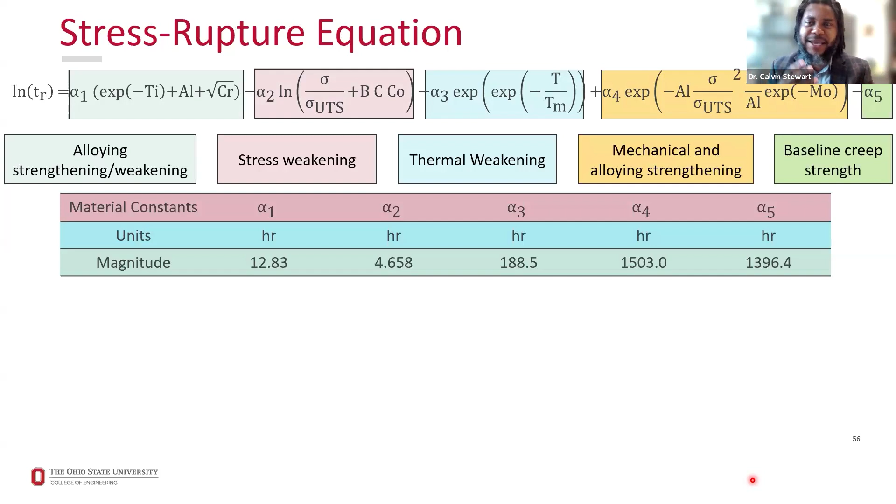But furthermore, when we're mixing different domains of science and generating these equations, sometimes we have relationships that would be good in one domain - oh, these are good dimensions - and in another domain of science are not allowed. So there's also these quandaries of going from chemical equations to mechanics of materials type restrictions on these equations.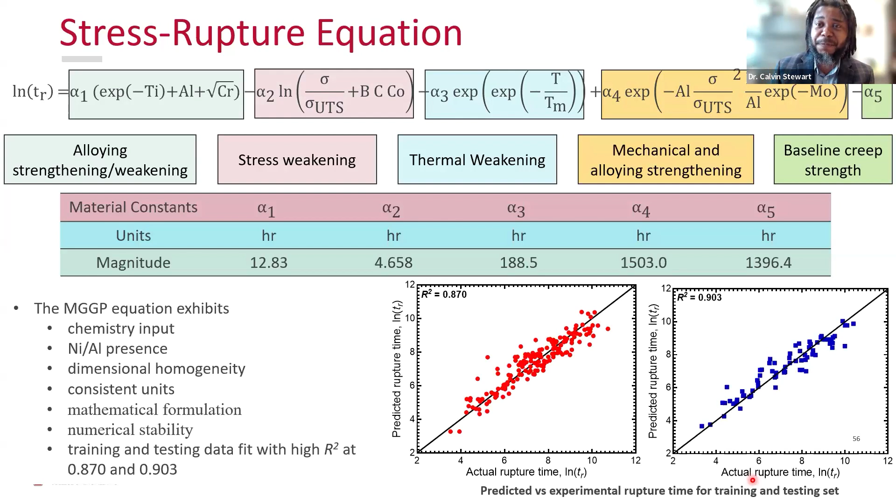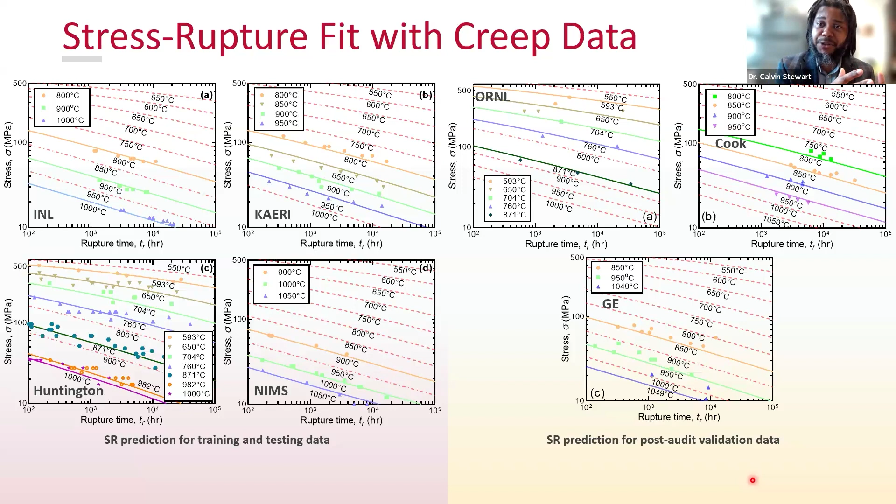So in some of our current work, we've generated these equations. We've generated an equation connecting chemistry directly to the creep resistance of a material. Then we've done our evaluation of training and test data that we've calibrated the model to, versus hidden data that the model never saw, and we see that we get accurate predictions. Finally, with this human interpretable equation, we can actually optimize the chemistry and design a chemistry that has extremely high resistance compared to the chemistries of our experiments.

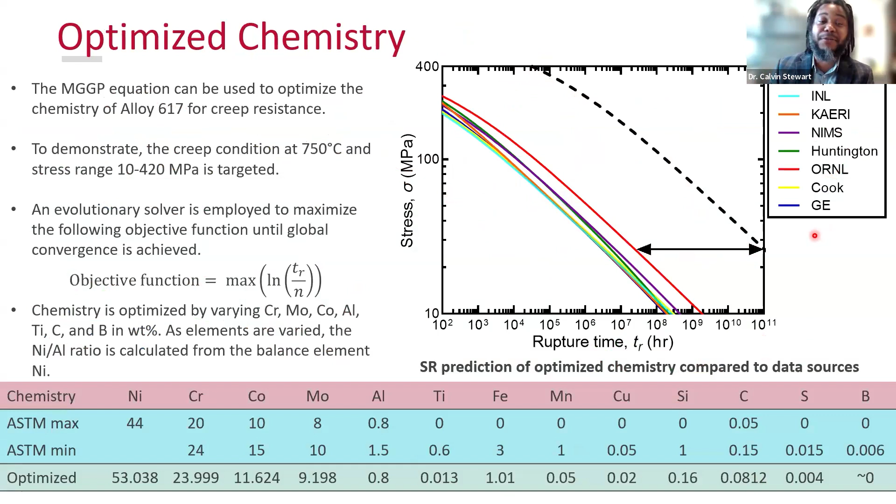We're actually able to find chemistries that have incredible capabilities. In fact, maybe this is a little too incredible.

So to close the loop, what we've finally done, what we're literally doing right now, is using calculated phase diagrams, computational thermodynamics, to determine in our optimized chemistry what structures are we actually forming. What is the difference, why are we improving our resistance, can we prove it via what structures form? What we're finding is that with the optimized chemistry, we basically improved the stability of the carbides - went from metastable carbides that change as a function of temperature, from M6C to M23C6, to a stable M23C6 carbide that also has 100 degrees more stability in terms of equilibrium.

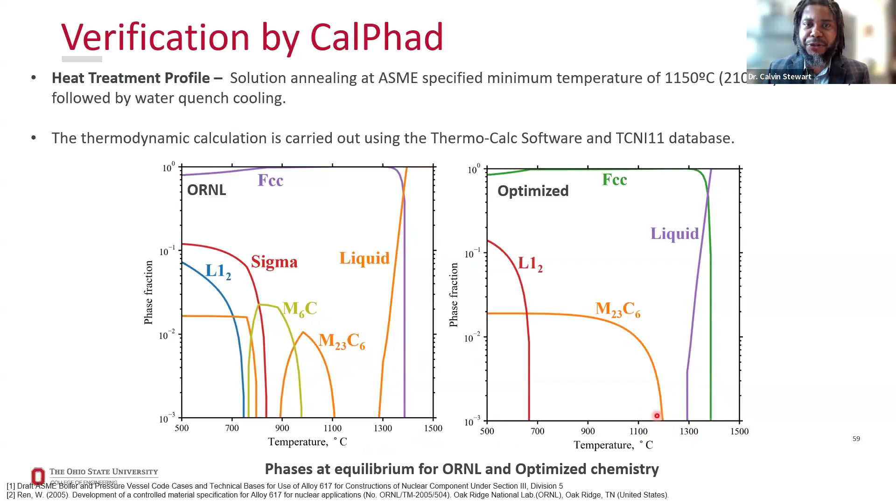So in order to do all of this computational work, we use our Extreme Computational Lab, where we have high-powered workstation computers, and then we hook into the Ohio Supercomputer Center, where we're able to generate hundreds of millions of candidate equations using AI.

So I've probably gone to a good point. We're at the end here. Thank you for your time and attention, and I'll be happy to take any questions from the audience.